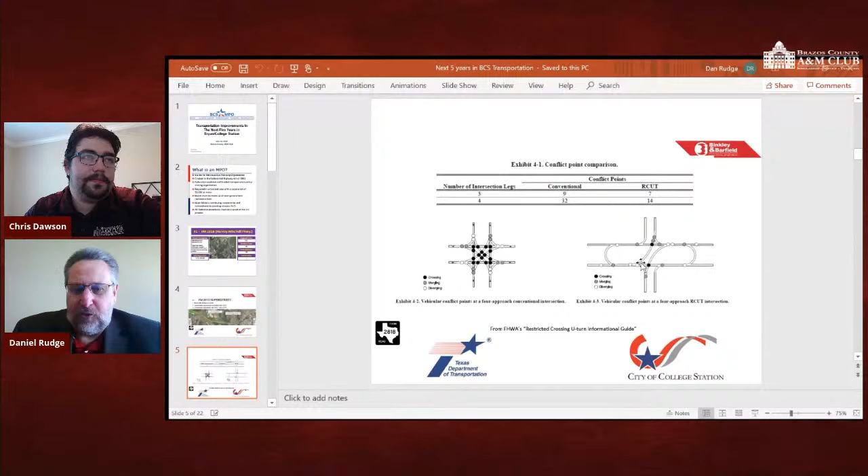So if you look at what we're trying to do, this is what's called a restricted crossing U-turn design. That was what I was afraid of. If you look at Holloman, pretend that the one on the right is Holloman Drive. If you wanted to go straight across on Holloman, you'll no longer be allowed to do that. Instead, you'll make a right-hand turn and then proceed down 2818 for a little while, and then make a U-turn. Same thing with Holloman going in the opposite direction. The only turns that will be allowed will be left-hand turns off of 2818 onto Holloman Drive. Same thing will happen at Luther and probably Bush. Again, the reason for that is because we're reducing the number of conflict points.

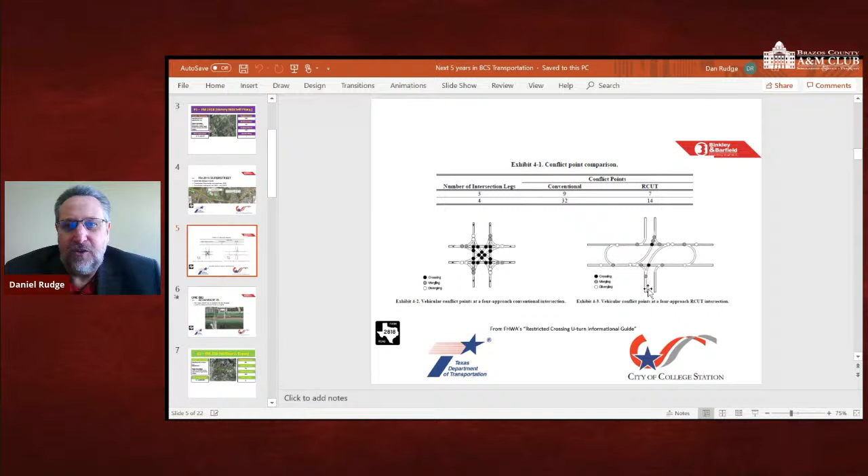But if you look at it in terms of delay time, if we just added an additional lane in each direction, so we had 3 lanes in each direction, the amount of delay at Holloman would go from 164 seconds to about 123 seconds, and would exceed 164 seconds within 5 years. By going to this R-cut type of intersection, we end up reducing that down to 42 seconds. So that's the reason why the super street was selected. One of the advantages of doing the super street is that if we ever make 2818 into a freeway, then the super street can be transformed into frontage roads for 2818.

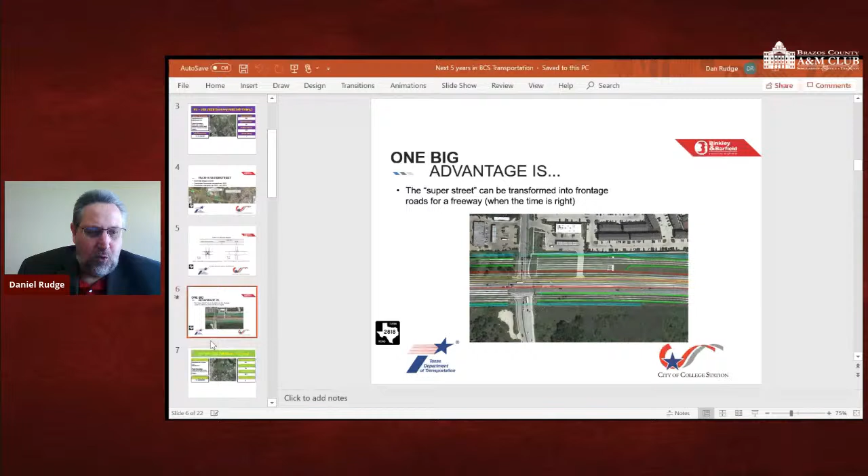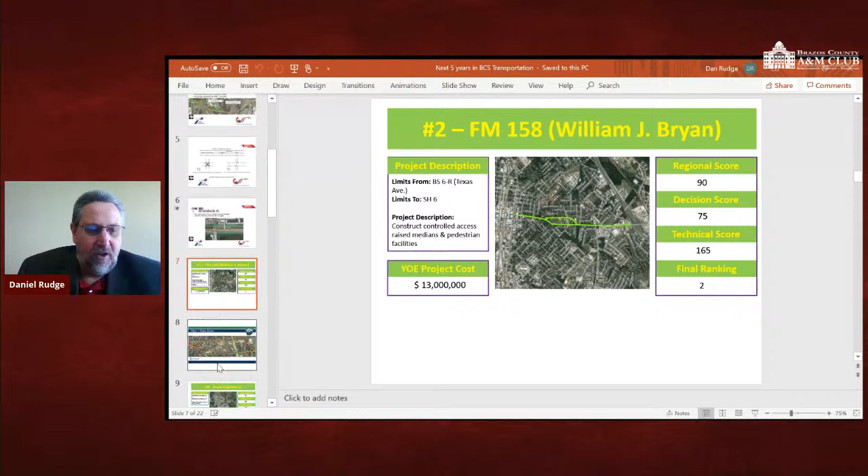The next project that we're looking at is FM 158, which is William J. Bryan between Business Route 6, Texas Avenue, and State Highway 6. It is a very interesting project in that they are installing raised medians and pedestrian facilities, but they're doing more than that. I thought I'd share with you the really busy area of the program.

This is the park, and you can see they're adding roundabouts on both ends of the park. They're adding traffic signals here at Coulter, and then these other lights that you see are actually pedestrian beacons.

So if people want to cross the street to get to the park, they can actually hit the beacon, and the light may turn red or it may flash yellow to warn drivers that there are pedestrians or bicyclists in the area.

Now, we had to break up William J. Bryan Parkway into several different segments. If you'd like to look at each one of the segments, you may do so. Just go to wjb.com, and all of the designs for each one of the segments on the roadway is available at that website.

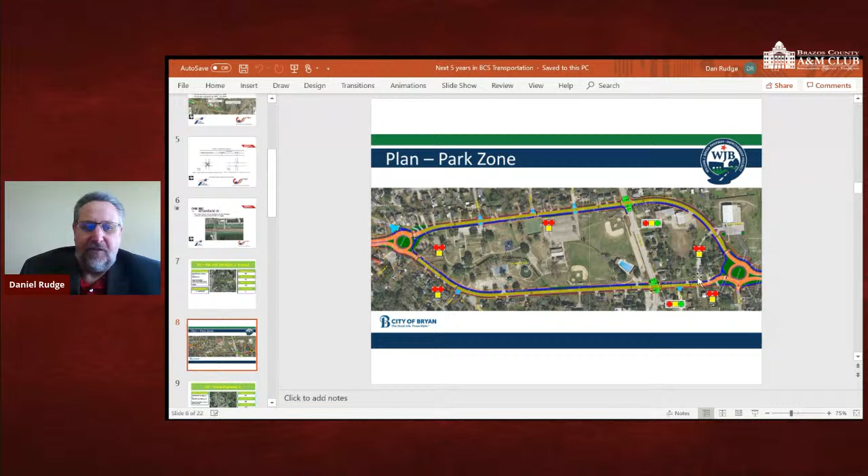All of the designs were driven by citizen comment, and so the citizens told us what they wanted, what was important. We came back with some design drawings, and they said, yep, this is what we're looking for on William J. Bryan. So it's an intent to improve bicycle and pedestrian safety, to kind of slow folks down through some of the residential areas, and still make the road function during rush hour.

So I think probably the project you're all most interested in is going to be the State Highway 6 project. And that will run from State Highway 21 in the north all the way down to William Fitch, or State Highway 40 in the south. We'll be widening it from 4 to 6 lanes.

We are very thankful that the Texas Transportation Commission decided this was an important project, because we receive about $13 million a year in funding for projects in Brazos County. So we put the full $13 million on State Highway 6 and said, we'll do what we can with it. And the Texas Transportation Commission said, no, $13 million doesn't cover it. So here's another $161 million to help you make the project become a reality.

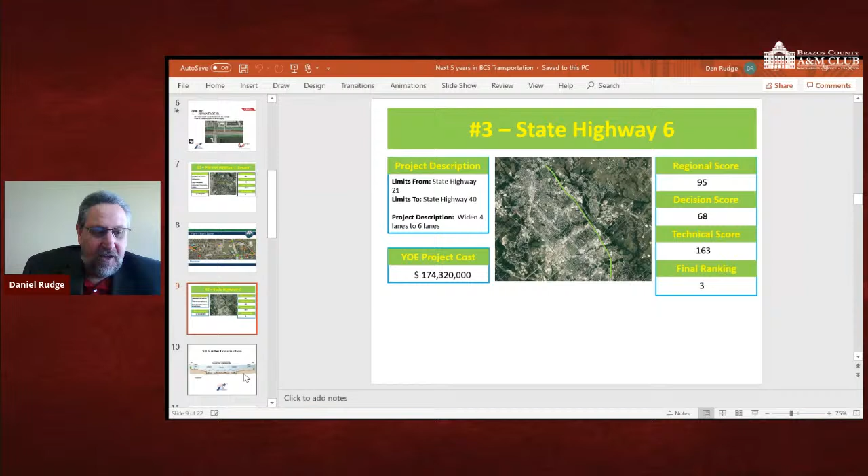To give you an idea of what it will eventually look like, here is State Highway 6 after construction. We'll focus in a little bit on this area in a second. But what I wanted to show you is that some of the frontage roads will actually have 3 lanes where they're necessary.

In this particular drawing, we're showing a bike lane, but after consulting with bicyclists and pedestrians, they didn't like the idea of having a bike lane on a frontage road with a speed greater than 35 miles per hour. So instead, we're going to widen the shared use path on the outside to give them a little bit bigger buffer, so bicyclists and pedestrians can use that path. We're taking the 3 feet that we would use for the bike lane and adding a couple of feet to the shared use path.

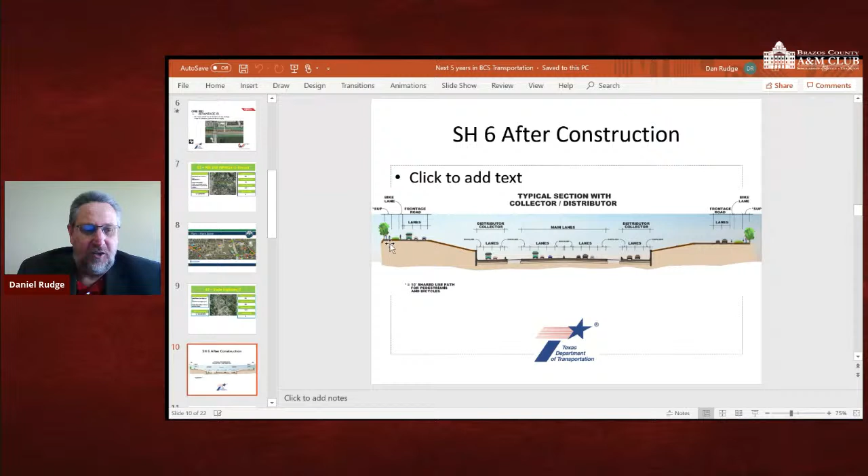As we scroll in a little closer to State Highway 6, you'll notice that we have 6 lanes of traffic on the main lanes, 3 in each direction. And then we have these things that we are calling distributor collector roads. During the process of developing the designs for State Highway 6, we realized that most people, based on our traffic analysis, only get on State Highway 6 for about 2 miles when they're in Bryan-College Station.

And they may only be going 1 or 2 exits. So what the distributor collector lanes allows you to do is to get down below the frontage road, so you don't have to go through all of the traffic lights at each one of the intersections, and still be able to get off at your exit without actually having to move all the way over onto the main lanes.

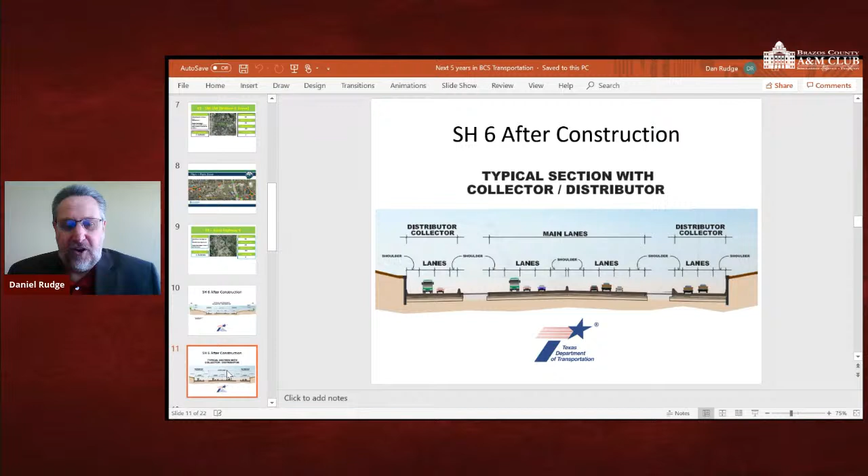With this kind of a design, it provides much greater safety. It reduces congestion on the main lanes, and it provides a better driving experience for everybody that is trying to access State Highway 6.

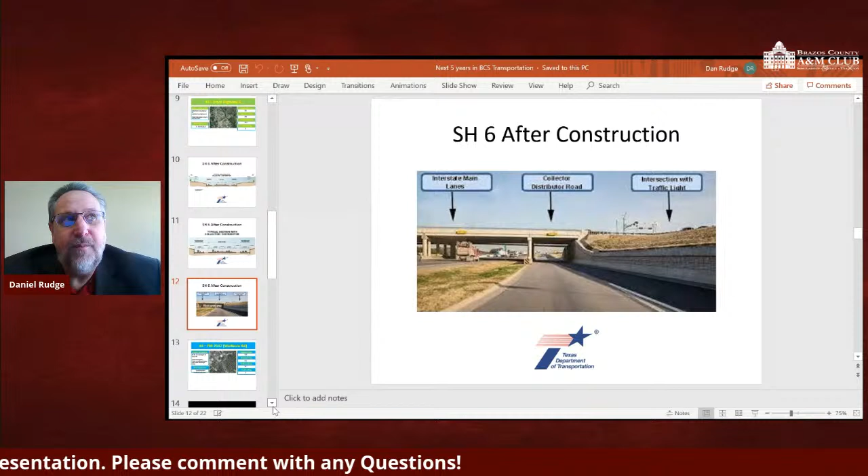We have one location on State Highway 6 where the last time we did traffic counts, we had a traffic count in excess of 93,000 vehicles a day. To give you an idea, the only other locations in the state of Texas that have 93,000 vehicles a day are in Houston, Dallas, Austin, and San Antonio, on roadways that are at least 6 lanes in each direction. So you can see why we had to make improvements to deal with congestion on State Highway 6.

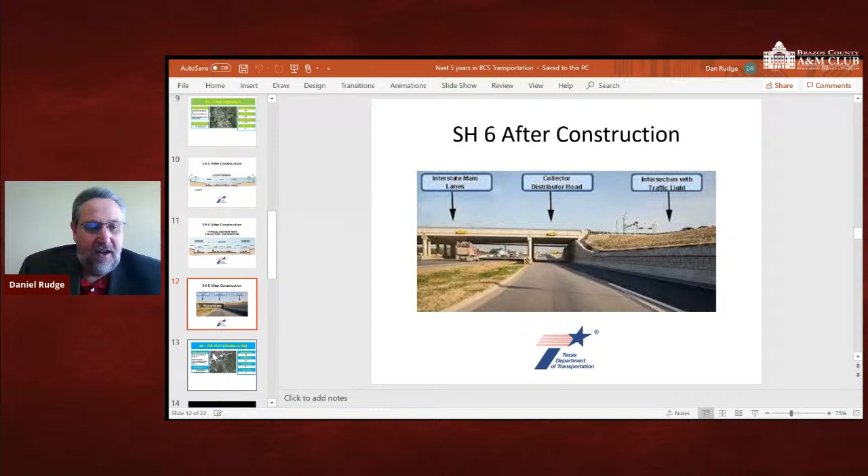The last project I wanted to get to in any depth was the George Bush, Wellborn single-point urban interchange. We placed about $5 million of MPO funding on that project, and the other $64 million will eventually come from the Texas Transportation Commission.

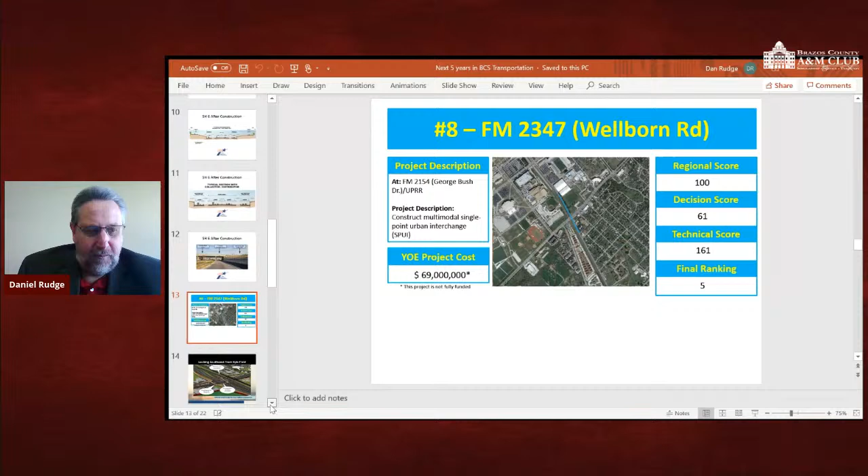Unfortunately, we had this thing called a pandemic, and as a result, the revenues that were anticipated by the Texas Transportation Commission have dropped significantly. So, as you'll see in a little bit when I show you the timing for these projects, this project is going to slide for a while until the money becomes available and we can get around to it.

So what would this interchange look like? This is the below-ground concept for Bush-Wellborn. We did several public hearings, met with lots of local community organizations and citizen groups, and they told us they preferred a below-ground concept as opposed to a bunch of flyover lanes.

The arrow here is pointing towards Blue Bell Park, the existing McDonald's is here, and Aggieland Outfitters is over here. If you're on Bush-Wellborn, your descent will begin, and you'll go under both the Union Pacific Railroad tracks and under Wellborn Road to come to the intersection with Wellborn. If you're staying on Bush, you'll continue back up on the other side and come out about where the Subway is located on Bush.

If you're on Wellborn, you'll be able to bypass the intersection completely on an elevated segment. If you want to get on Bush, you'll go down into the below-ground concept, and there'll be a signalized intersection where you'll be able to make the left or right to get on Bush, and the same thing with Bush to get on Wellborn, either going south or north.

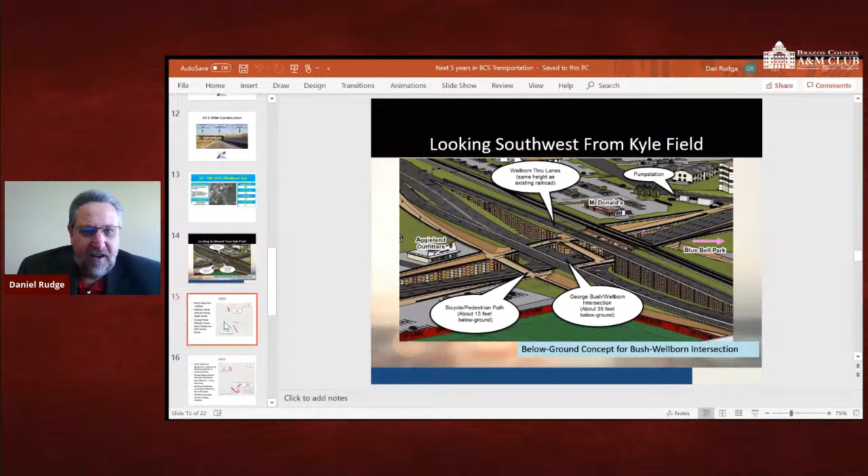So what is everything going to look like? In 2020, we're going to begin a couple of projects, but not a lot going on in fiscal year 2020. There is a project on our books to begin looking at medians on Texas Avenue all the way from 21 to University Drive.

I don't think we'll see any of those medians actually be constructed, but that red line you see here is the realignment of Waco Street so we can develop a signalized intersection at Waco Street with its intersection with 21. We're also doing bicycle and pedestrian improvements on Palasota, and there are improvements being made on Old Hearne Street.

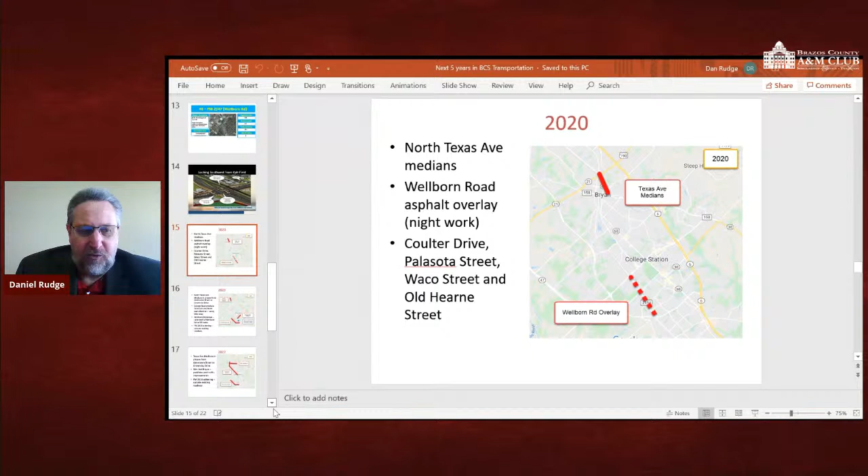Wellborn is a busy street and the roadbed is beginning to deteriorate, so we're looking at doing some overlays on Wellborn to improve that. It's not shown in these particular diagrams, but we'll talk about that in a second.

So in 2021, the North Texas Avenue medians in phases will begin. They'll start up around 21 and work their way towards Villa Maria, then eventually connect all the way down to University Drive. We're also adding some medians on George Bush Drive while maintaining the 2 lanes in each direction to improve safety, and we'll begin construction of the 2818 widening.

2818 is an interesting road because right now we're using about 120 feet of the existing right-of-way, but TxDOT already owns 400 feet of existing right-of-way on 2818. So as construction takes place, it will be outside the existing roadway in that additional space, and the only disruption to current traffic will be when it's time to hook up the new sections.

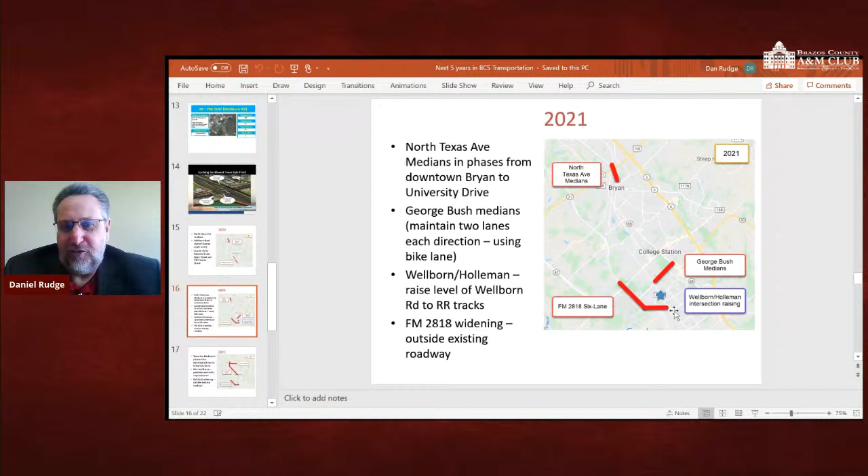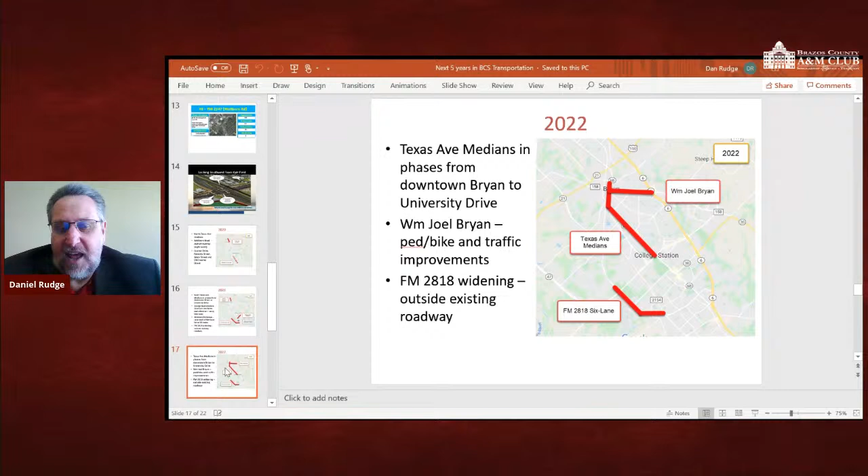That's in 2021. In 2022, we continue on with the Texas Avenue medians, begin the William Joel Bryan bike, pedestrian, and traffic improvements I showed you earlier, and 2818 continues its construction process outside the existing roadway.

As we move into 2023, we call this locally kind of a joke—Armageddon here in Bryan-College Station. We'll have the Texas Avenue Medians project continuing, the William Joel Bryan project continuing, finishing up the 2818 project, and also beginning the 6-laning of State Highway 6. So all the major ways to move around Bryan-College Station will probably be under construction during 2023.

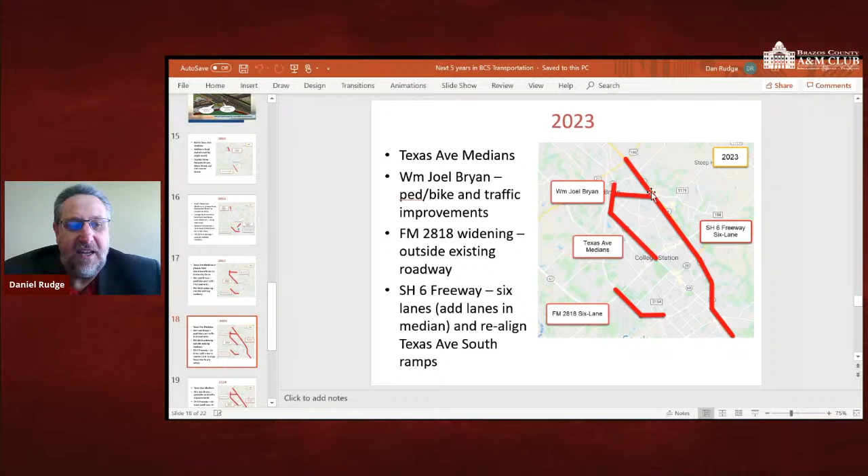I caution on that because the pandemic has changed some of the funding scenarios we're looking at, so we're not sure if State Highway 6 will start in 2023 or slide back an additional year. But the intention is for it to begin in 2023.

In 2024 we have the finalization of the Texas Avenue median projects, completion of the William Joel Bryan bike and traffic improvements, continuation of the State Highway 6 project, and the Bush-Wellborn interchange project was intended to be done in 2024. But because of the pandemic and funding issues, the Texas Transportation Commission decided to use their discretionary funding on a small project called I-35 in downtown Austin instead of the Bush-Wellborn interchange. Improving Interstate 35 between the river and 290 is a higher priority for the commission right now, so we'll continue to pursue that funding. It is the number one ranked project for the Bryan district, but we just didn't receive it in the most recent Unified Transportation Program update.

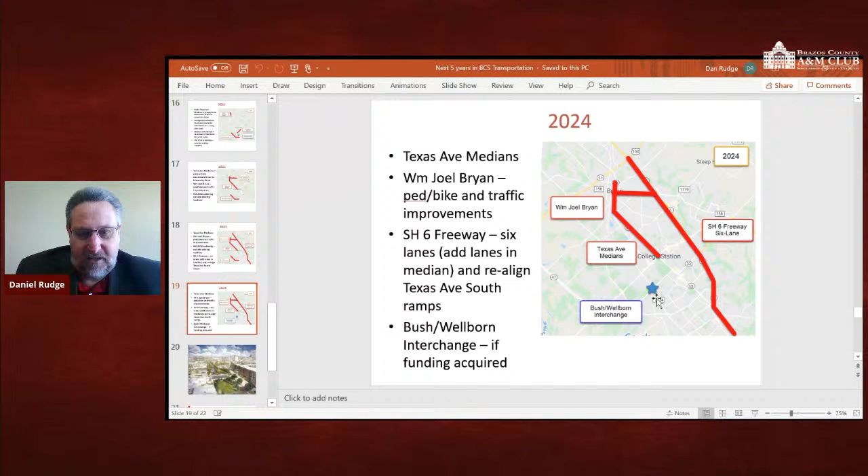In addition to everything I've shown you, we also have the University Drive project currently being studied. That's looking at taking 4 lanes of University Drive and putting them basically in a tunnel between College Avenue and Wellborn Road, then reducing the at-grade footprint to 1 lane in each direction with a lot of bicycle and pedestrian improvements.

This project received so much attention that the Brazos County Commissioners formed a Regional Mobility Authority to look at the potential for this project to take place, and if it cannot take place, what we might do instead. That's the reason the Regional Mobility Authority was formed. However, they'll be looking at ways to improve the transportation network throughout Brazos County, and we're now developing a strategic plan for the RMA, looking at other projects they may be interested in.